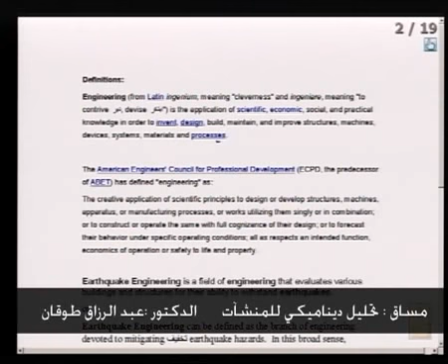خلينا نشوف معنى كلمة انجينيرينج. انجينيرينج جاية من الكلمة اللاتينية انجينيوم، بتعني كليفرنس، يعني الهندسة هي عبارة عن علم ذكاء. وأيضا لها معنى contrive or devise، يعني إما ابتكر أو تدبر الكون اللي بنحبه.

هل هذه لها هدف ولا هي لذاتها؟ is the application of scientific, economic, social and practical knowledge in order to what؟ شو مكتوب هون؟ يعني أنا إذا شرحت لك علم لازم تعرف أنت كيف بدك تستفيد منه. هلا إذا أنا أعطيتك معلومة ما بتعرفش تستفيد منها وقفني.

I am not a scientist, I am an engineer. What is the difference between scientist and engineer? Scientist may develop a theory, its application might come after 100 years or 300 years. The engineer is not interested in any knowledge that he doesn't know how to apply. So if I tell you this is a fixed joint, you tell me, show it to me.

If I tell you this is a fixed joint as a scientist, you tell me this is an assumption. You know the difference? Superstring theory is a theory in physics, has no practical applications up to now. It will have practical applications maybe in 5 years or 100 years. I'm not interested to teach you superstring theory because it is not engineering.

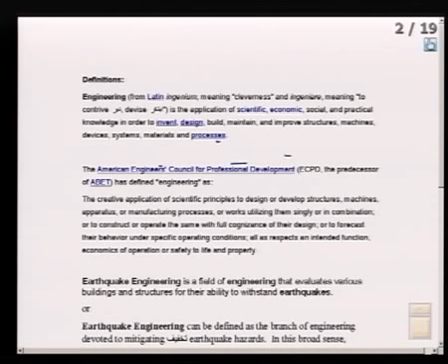What does that mean? A problem in education. If we cannot overcome this problem of education, we cannot develop our country. That's why if you find a different way of education, ask yourself: does it make you a better person? If it does, go with it. If it sets you back, search for another. And if you are satisfied with your current standing, be certain that there is better thinking around, search for it. If you are glad with my teaching, make sure there is a better teacher than me, and search for him. So one of the characteristics of science is tentative.

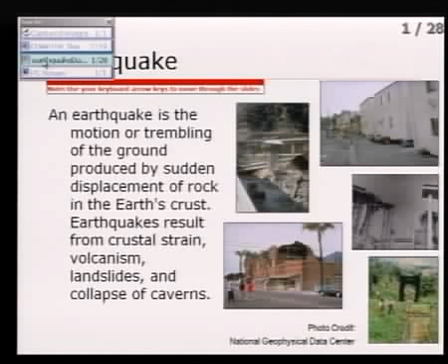In California, they built an artificial lake. When they started pouring water into it, they noticed the earth began giving signs of earthquake activity, which increased with the filling of the reservoir. So making major changes on earth resulted in displacement of the crust, which causes earthquakes.

So earthquakes are either human-made or nature-made. When a volcano erupts and an earthquake follows, this is nature-made. When we make explosions and an earthquake occurs, this is man-made. Notice, I am reading this critically, checking whether it is right or wrong. If it is right, it is not complete, and if it is wrong, it needs correction.

So this mindset should be kept all the way through education. When I show you something, think of one of two things: first, is it right to accept it? And if it is right, what is missing from it?

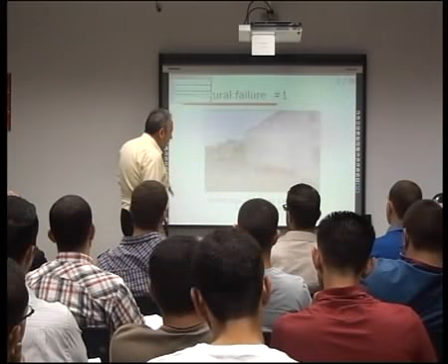What do you see in this picture? Damage of what? Are these buildings damaged? No. Who said yes, who said no? Why? What is the damage here?

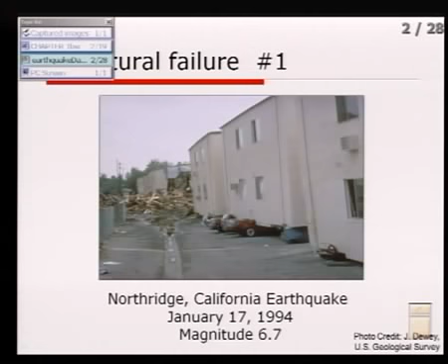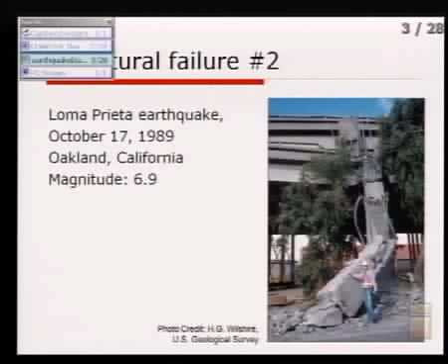This bridge collapsed because of the collapse of the column. All the bridge decks come over each other. You got collapses, not major, a small collapse in a column, but this is a collapse - this is a failure.

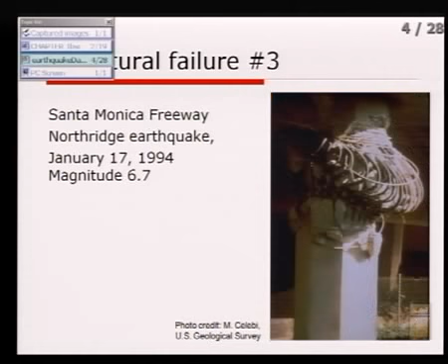Look at this, this type of damage. Here you've got a street, and between these you've got a street. With this falling down, what happens to the street?

Suppose an earthquake occurs in Nablus, God forbid. We have Faisal Street and a building closes off Faisal Street. What will happen?

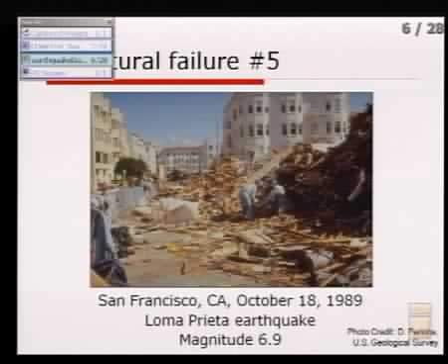Look at this video. Do you see any collapse in these? Look at the beams - everything is okay, but the problem is that this story, the first story, collapsed, and the whole beam - the building tilted.

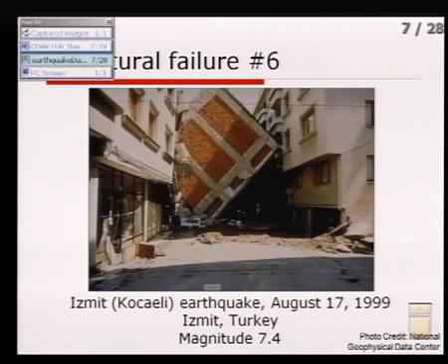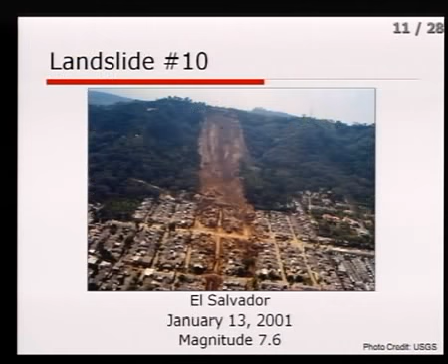Look at this landslide - all of these are housing. Repeated, what happens to this housing? Damage. The same is true here.

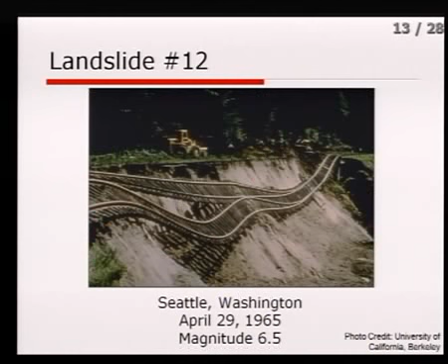Landslide due to earthquake. Look at this railroad. When a landslide occurs after an earthquake, what happens to the transportation? For railroads, it fails. For highways, it fails.

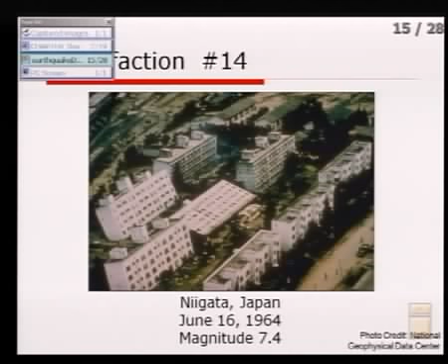Sometimes liquefaction occurs, and if liquefaction occurs in the ground, what will happen to the building? It will turn over.

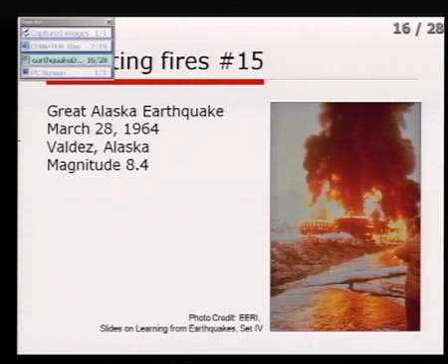Earthquakes sometimes cause fires. In 1906, the earthquake that occurred in San Francisco broke the gas lines, and the fire burned the whole city. So the consequences of earthquakes are so dangerous, you see that a damaging earthquake can damage anything.

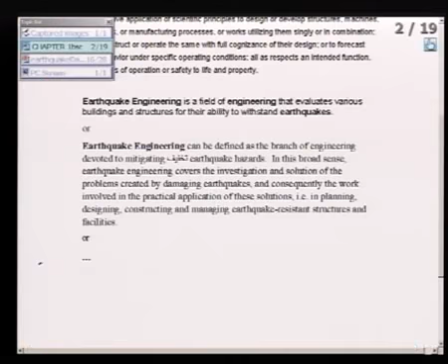Is there another definition of earthquake? Yes. The type of definition we will adopt in this course says earthquake engineering is the science that deals with the effect of earthquakes on people and their environment. It covers everything, and with methods of reducing those effects.

In the 90s, an earthquake occurred in Cairo. The number of people who died under feet was more than the number who died under the collapse of buildings. We were about to miss a friend in the 2004 earthquake. When it occurred, people escaped from the building into the stairs. When you rush into the stairs, someone slower than the other, and if he pushes him, what will happen? All people will be under feet.

One of the secretaries was pushed and was being supported by two others before being trampled. Hamis Otbela was one of the people who supported her, and her hand was injured by this.

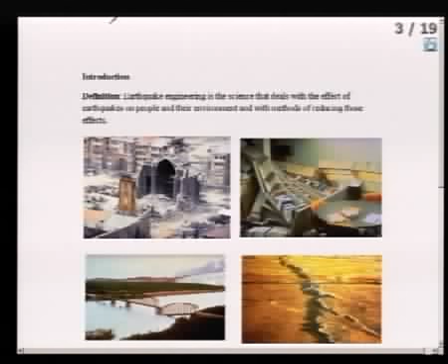What do you do when an earthquake occurs? Something important, we will come to it. But there are many aspects to the environment that we need to look at.

As an example, look at this school. What happens to the shelves? At this church, at this bridge, at the land - these are examples supporting the previous examples of earthquakes.

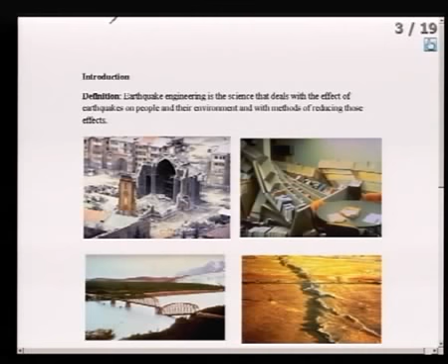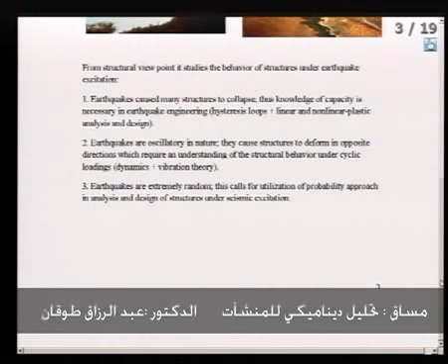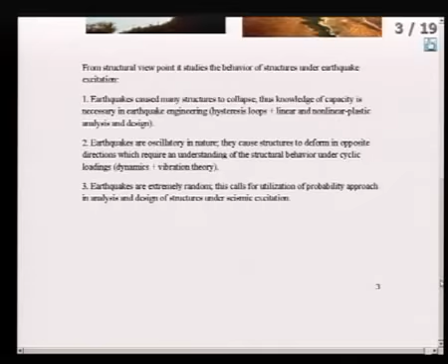From a structural viewpoint, it studies the behavior of structures under earthquake excitation. What are the points that need to be covered? When a structure fails, is it in the elastic range or does it enter the inelastic range? Are we satisfied with elastic analysis, or should we do non-linear analysis? It fails in the inelastic range. Now if I look at a structure...

This is the material properties of steel, the stress-strain curve of mild steel. Failure occurs at the top here. Elastic analysis means I am in this range. This is for a material.

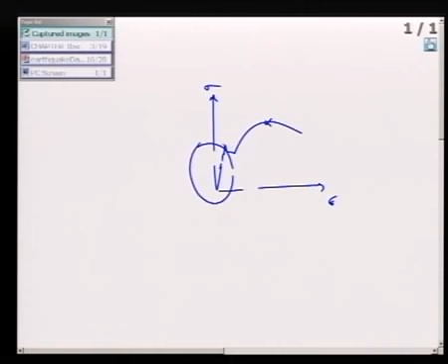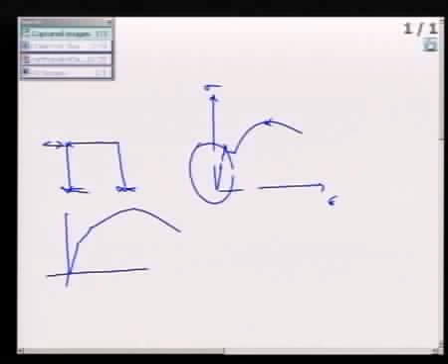If we do it for a structure under a lateral load, the structure will behave something like this and collapse. It means it starts losing its linearity every time a joint in it goes into the inelastic range and forms something called a plastic hinge. So if you want to understand at what load a structure fails, you should understand nonlinear behavior.

Now, can we design structures only for the linear region? Yes, but this will cause very large members, which we'll talk about. So if you want to do an economical structure, you should understand something called the hysteresis loop.

It is a loop that shows how you load, unload, load and unload, load and unload - call it a loop. The hysteresis loop is the type of stress-strain relationship we need in order to understand the collapse of structures, together with linear and non-linear plastic analysis and design. In our master's engineering program, we provide a course called plastic design, which is an introduction to this one.

Can we design a structure in the linear range? Yes, but it needs very big members, so on an economical scale it will be too costly. Do we have to do it? Yes, we have to do it in hospitals, schools, nuclear power stations, etc., because they are important.

So this, whether you learn it or not, is a special topic, not a fundamental one. It is special, to differentiate you from others. If we look at the other part, earthquakes are oscillatory in nature. They cause structures to deform in opposite directions, which requires an understanding of structural behavior under cyclic loading, which is vibration. Cyclic loading means the load goes back and forth, and this requires vibration theory, which is dynamics.

They call for utilization of a probability approach in the analysis and design of structures under seismic excitation. If this is called vibration, this is called random vibration. The word random means something that has a law which I don't know. If I don't know it, I call it random. It means I am speaking about something I don't know. I'll give you an example.

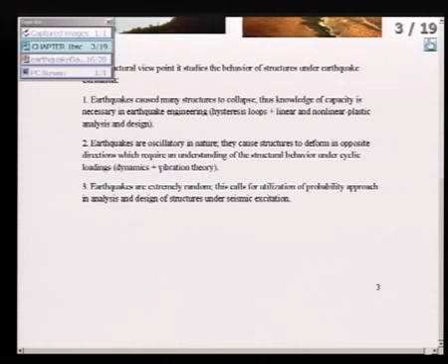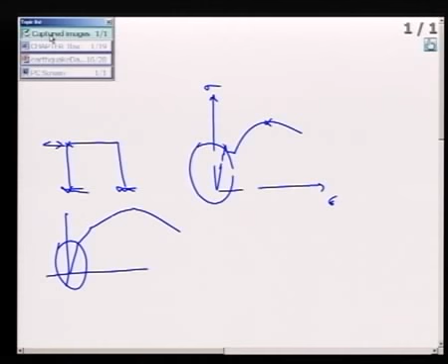Now, what are the characteristics of earthquakes? Characteristics of science. Can you tell me characteristics of science? In order to know where you stand, there are certain characteristics. One,

Science is testable. What does it mean, testable? If I leave this, it goes downward, okay? I tell you that removing my fingers will bring this downward. Testable, I remove my fingers. If it goes downward, this is science.

If I cannot do a test, this is not science. So one objective of science is what? Testable. You can test it. If I give you anything, I call it science. Tell me, show it to me. Show that what you said is science. Prove it to me. Testable.

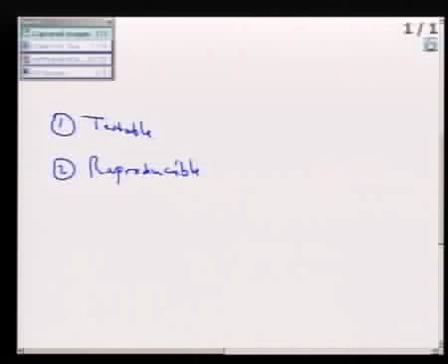The second, it is reproducible. What does that mean? If I do this test in United States, it gives the same result or not? If it doesn't give the same result, it is not science. Okay?

Explanatory. My mother, your mother, my father, your father, that child will see this falls down when I leave it. And he will see it repeating itself at every place on the earth. Give us an explanation of it. Without explanation, you don't have science.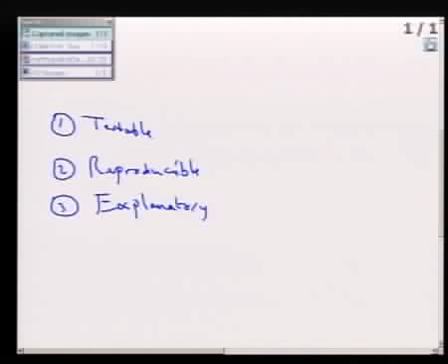When Newton provided his law, one of the words that were important to Newton, he said, I was able to look a little bit further because I stood on top of giants. What does that mean? It means in order to be able to look better, you should have someone to raise you on top. The teachers of Newton were so great to the extent that they put him to the level that he can explain the law of gravity.

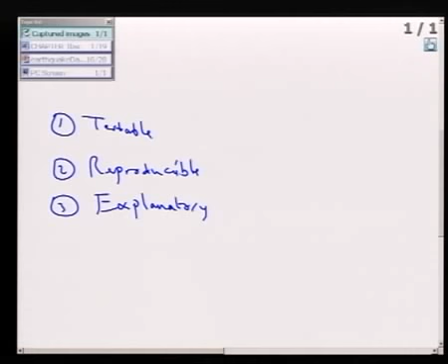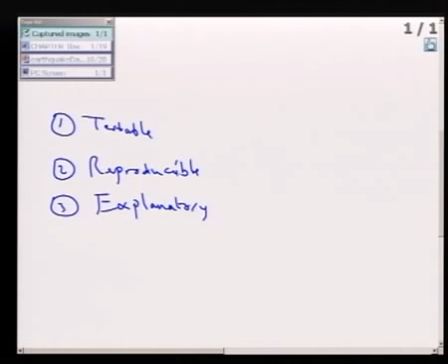Okay? So you need a very good teacher in order to make you able to see what others cannot see. But he cannot see what you can see. If I put my child on my shoulder, I will ask my child, what do you see? And I will learn from him what he is going to see.

So the objective of teaching is: you are a child and I am a father. I need to put you on top of my shoulder. If you are on top of my shoulder and you see what I see, shame on you. Because on top of my shoulder, you should see more. So if I put you on top of my shoulder, the objective is that you should see more. If you see more, the benefit of such saying goes only to you or to the person who put you on his shoulder.

That's why a person is interested in being a teacher. Why? Because of the benefit of teaching.

Predicted. If you do not have prediction, you are not a science. I say that tomorrow the weather will be shiny. Tomorrow it is cloudy, nobody will hear to me. I say tomorrow will be shiny. Tomorrow it is shiny. Then you will come to me and tell me, after tomorrow it will be what? Now if I cannot predict in the future, I am not a scientist.

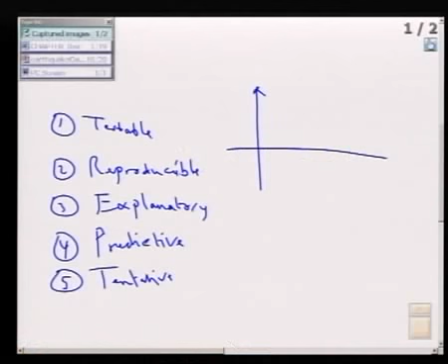If an earthquake occurs at San Andreas Fault, it will never be repeated in life. Which means that if San Andreas makes another earthquake at another time, the frequency, the duration, etc. will be different. The earthquake, when we measure it, it comes in this form. Suppose we want to measure displacement of the ground against time, or acceleration against time, it will come into this form.

This form has 3 characteristics: amplitude, duration, and frequency. 3 characteristics: frequency, duration, and amplitude. Up till now, no earthquake repeats itself. That's why it is a very random process.

So is it testable? Yes. When an earthquake occurs at any place in the earth, even in United States or in California, all scientists are very interested to go and see. In the last century, we lived in two main civilizations, Russian civilization and Western civilization. In 1988, an earthquake occurred in Armenia, in Russia.

It destroyed villages completely. At that time, Russian civilization was going down, and thus American civilization starts. We are the only civilization that you can learn from, when they speak of this. In 1994, the Northridge earthquake in the United States lasted 30 seconds.

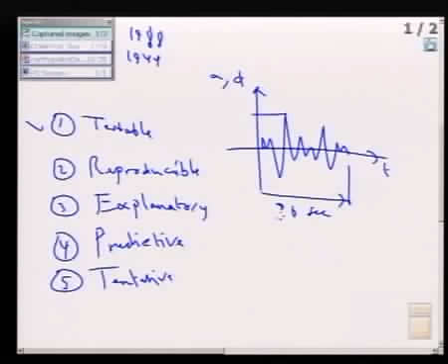Thus the catastrophes in life were so small. But what happened, I was living in America proposing 2 types of structures to withstand earthquake. If you want to do reinforced concrete, make shear walls. And if you want to make steel, make ductile moment resisting frames.

Ductile moment resisting frames were proposed to be the best structures to resist earthquake. These frames were ductile, but the joints in these frames were all welded joints. Now, they are designed to take an earthquake of magnitude 7. A magnitude 6 point something earthquake caused the welds to crack. It means that another earthquake in California might collapse hundreds of structures. This issue made all Americans so frightened.

Japan said, oh, I am the one who provides earthquake engineering to the world. Forget about Russia, forget about America. What was published in research in the 1980s in the United States was written in codes in Japan.

Let me tell you something. Research is the highest level of science. Code is the lowest level of science. So let me repeat: what was published in research in the United States in the 80s was written in codes in Japan. So everybody was so astonished by Japan's science.

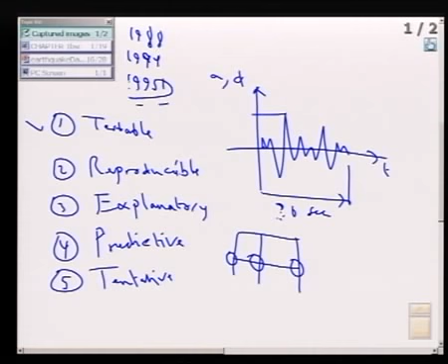This is 1994. In 1995, Kobe earthquake hit. They said that they designed their buildings to take an earthquake of magnitude 8. But in Kobe, 1995, it destroyed the whole city. Everyone started to be humble.

What does it mean, start to be humble? They realized that our knowledge in earthquake engineering has not still achieved a breakthrough. This is one thing that I want to tell you: I know that all theories trying to predict when an earthquake occurs have all failed.

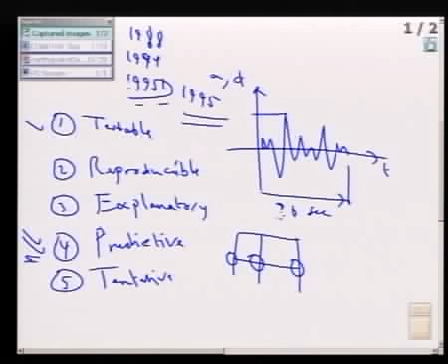An example here: since 1995 till now, we hear that within 10 years an earthquake will hit Palestine, a large earthquake will hit Palestine. 20 years have lapsed, and we are still hearing that in the next 10 years a large earthquake will hit Palestine. This is no different than the US or Russia. There is no science of prediction of earthquakes.

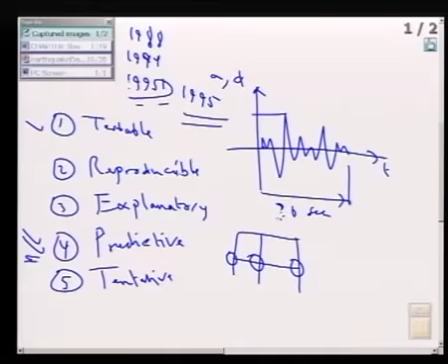Up till now, only one case in China in the 70s, they expected an earthquake and it occurred. Other than that, if anybody knows any science of prediction of earthquakes anywhere in the world, let him tell me about that. So prediction of when an earthquake occurs, up till now, is so far from being scientific. That's why we say we expect in the next 20 years, or in the next 50 years, an earthquake to occur.

I'll give you a small idea in seismic hazard, which is now much improved, but still a small idea. When an earthquake occurs, you see that the line of trees has shifted 3 meters. When we come to the explanation of the earthquake, let me remind you how we can estimate when an earthquake occurs due to such measurement. It means that if a fault moves, let's say, 10 centimeters a year, and if it breaks at 3 meters, then I expect in 30 years, at 10 centimeters a year, it will reach 3 meters and break.

This is a very primitive idea of predicting earthquakes, which I will explain later. So here in prediction, we are so low. What about explanation? We only have theories, I will only give you theories. There is no law for why an earthquake occurs. What is the difference between a law and a theory? Do we give you theories of structural analysis and laws of structural analysis? What is the difference between the two? What are the laws in structural analysis? The laws of conservation.

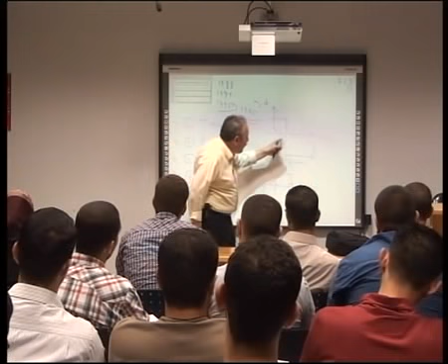It means it will have the same period, same frequency, and same amplitude. Up till now, if you can prove to me that two earthquakes, out of the hundreds of earthquake registrations we have, ever repeated itself, I will be very happy to see such evidence. We are in front of a science that is so variable. Our knowledge of it is so weak. And there are people saying we can't do anything.

I don't believe in that. My lesson to you in earthquake design: try as much as possible not to go into areas you do not know. For example, when we teach mechanics of materials, we know flexure for sure. We develop a theory, go to the lab, and what we develop in theory we see in the lab. This beam will take 100 kilonewton meter. Go and test it, it will take in the lab 99, 100, 101, etc.

Can anyone predict how much this beam will carry in shear? I challenge all the scientists in the whole world to give me a beam, predict its shear capacity, test it, and get the same shear capacity. That's why in mechanics of materials we tell you that in shear we do not have a model. In axial we know, in flexure we know, in shear what?